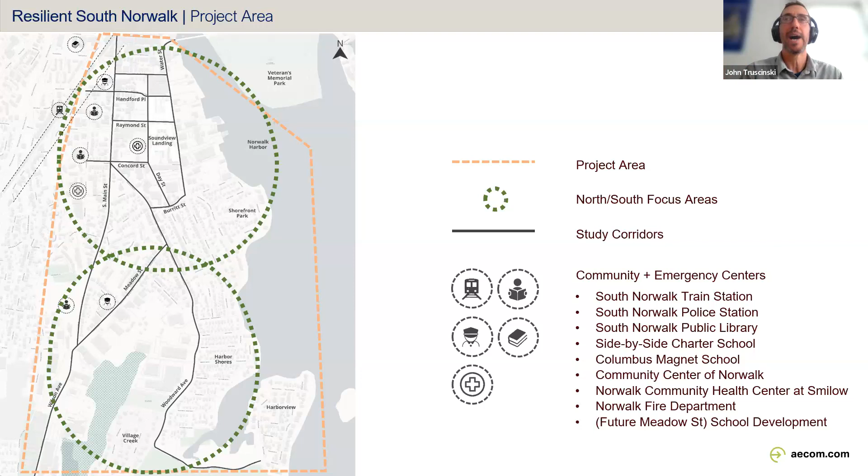As a reminder, the project has gotten through the first couple of milestones. The first part of the project was about mapping out the existing and the future conditions related to climate change.

This map here is one that the team put together, and it's showing the extent of the floodplain in the future under what we call a 1% annual chance storm, with the addition of 20 inches of sea level rise added to it.

And where does the 20 inches of sea level rise come from? That is the current guidance under Public Act 18-82, for municipalities to consider 20 inches of sea level rise by 2050. That is the upper bound of the likely range of what we expect in terms of sea level change out to mid-century.

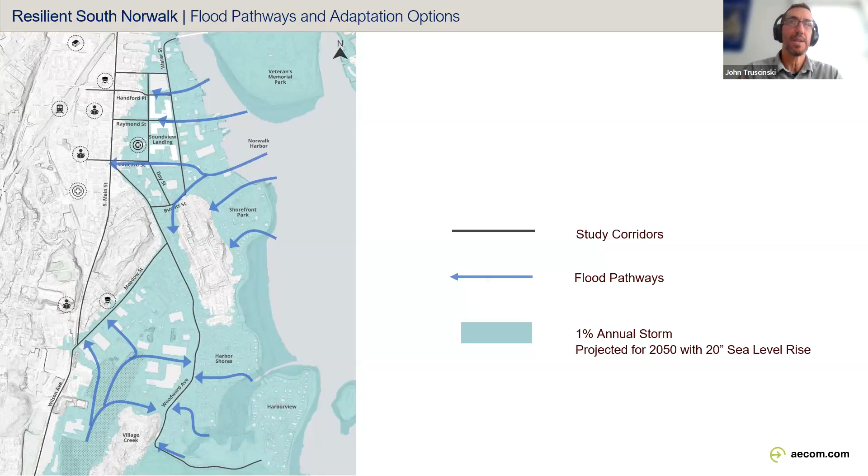Part of what's challenging is the team is sort of getting at all the different flood pathways, all of the different ways in which coastal storm surge enters into the area. So it's not just about blocking or cutting off the water in one location. There are multiple pathways in which a coastal storm surge will enter into both the northern and the southern part of the study area. So we're trying to get at that with the first part of this and looking at the future conditions for coastal flooding.

So this is the next step of the project, evaluating the set of what we call these adaptation options. What can we do, what solutions can we recommend and come up with to address both the flooding aspects of this and then also the increase in temperature?

Part of the reason why South Norwalk was an area that we felt we needed to prioritize was because you see this combination of vulnerability to heat and vulnerability to flooding.

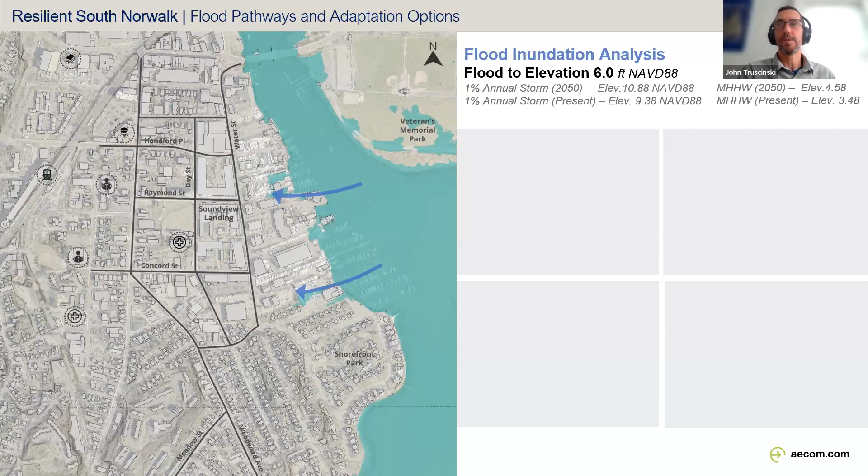This is the AECOM team starting to put together what they call the kit of parts, or the toolkit of potential adaptation options that the city can pursue, and starting to get those into a summary format for the public and for the city's staff and leadership.

So the first thing that we've looked at is the stormwater modeling. We have some schematics of the drainage structures and some of the pipe capacity and the network of stormwater pipes that we've gotten from the city.

So we have at least some understanding of where there are some pipes that just have limited capacity, where we have larger pipes feeding into smaller pipes, which could be causing some stormwater flooding as a result. And then we have some areas where we've identified outfalls that, during a higher than normal high tide or a storm surge, may be backflowing water in through the drainage structures into the street.

So that's kind of the low hanging fruit that the city can look at: adjusting the pipes with a backflow prevention, or looking at ways to just make sure that the storm surge is not backflowing water into the street.

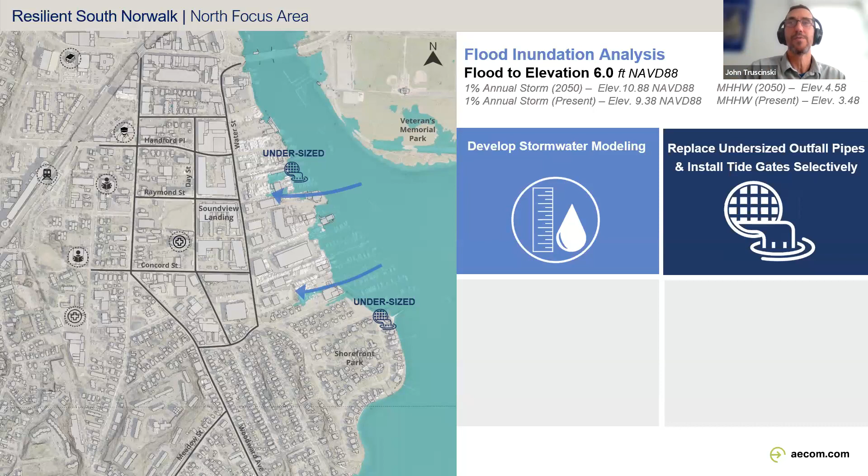The other aspect of doing a more in-depth stormwater model is that you really need to go out and do a survey, doing precise measurements of all the inverts and pipe sizes to get a more high resolution picture of where the capacity is insufficient for the amount of rain that we currently get and that we're going to get in the future. So the first couple of things are related to that stormwater.

The third thing is about green infrastructure. This is a way of trying to retain more of the stormwater. I'm sure most of you are familiar with the concept. The team is prioritizing this set of roads here for some sort of green infrastructure, retention and detention type strategies, and that can help to both improve some of the road flooding and also has a water quality benefit. So green infrastructure has got to be part of the toolkit in this area.

If you're looking for an example where a city is taking this approach, you can look at New Haven, where they've done a lot of distributed green infrastructure around downtown, and then they have projects to increase the capacity of the pipes that are conveying the stormwater.

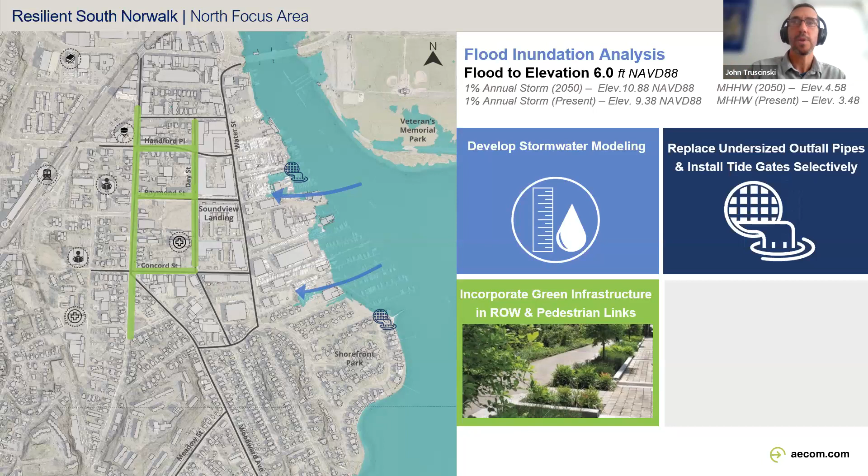This fourth aspect is about one of the key questions we wanted to answer with this project. To put it as simply as possible: under future conditions, which of the roads are going to flood under a range of different scenarios, and how high would the city need to elevate those roads in order to maintain dry access and egress across these roads. So basically we wanted to look at which roads are going to flood, and how high we'd need to elevate them to prevent flooding under these different scenarios.

So the next couple of slides are focused on that aspect of where we are in the study. Again, we are looking at this range of scenarios, and probably the simplest way to put this, it gets confusing with all the numbers, but all of these numbers are expressed in what's called NAVD 88.

So this is the vertical datum, basically the current expression of sea level, the 0.0 for sea level. So when we look at different storm surges and how high you would need to elevate the road over the expected storm surge, we look at these in NAVD 88 to understand it.

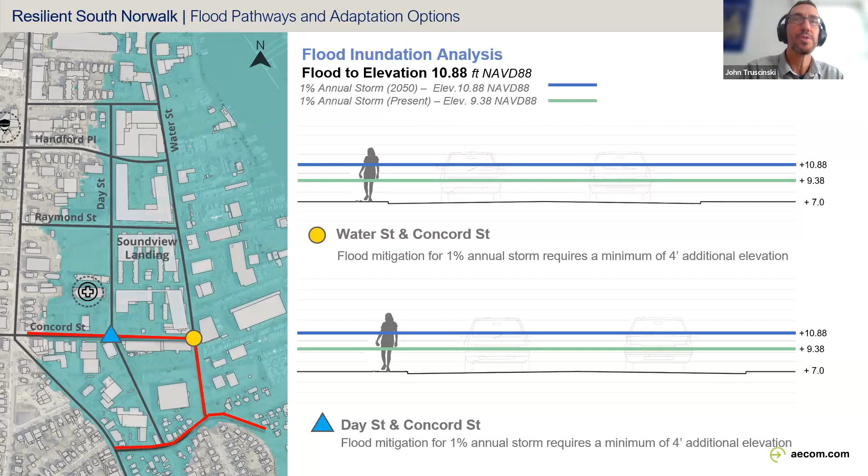So currently, the depth of flooding is about up to your waist. The future flood would be up to your chest, because the road is at elevation 7 now. That's the case for both the intersection of Concord and Water, as well as Concord and Day—both are at elevation 7 currently.

Now, what's interesting is that the redevelopment that happened—I think this was Soundview Landing, but also the redevelopment of the park at the corner of Raymond and Day, John Ryan Park—already elevated that intersection as part of the redevelopment. That intersection was brought up to 12.5 feet, so it's already above the future 1% annual chance storm with 20 inches of sea level rise.

Now compare that to the intersection of Raymond and Water, which is one of those spots where the road is actually at elevation 5. In order to bring that part of Water Street up above the 1% annual chance storm, you'd have to add a lot of elevation to it. So that's going to be tricky.

We can get into what makes that complicated as we go along here, but I just want to get through the rest of my slides.

This is comparing, so if you decided that Day Street is the corridor to prioritize for elevation, you've already got that intersection with Raymond and Day which is already high, and then it slopes down as you go south.

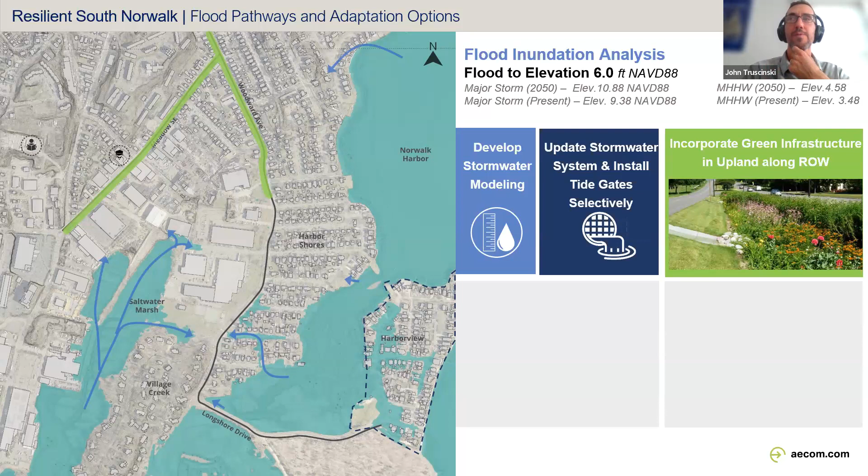The team also looked at the edges of Village Creek. They proposed this idea of flood berms or something like that. I'm personally a little skeptical about that because you're not going to be able to put flood berms directly up against the tidal wetlands there.

So the thing to think about there would be the commercial and industrial properties, those sites. How those evolve in the future is a key question. Any way in which you can improve the setbacks on those sites, improve some of the room to work with, would potentially allow you to take an approach where you put some kind of flood protection on the tidal wetlands side of those commercial properties.

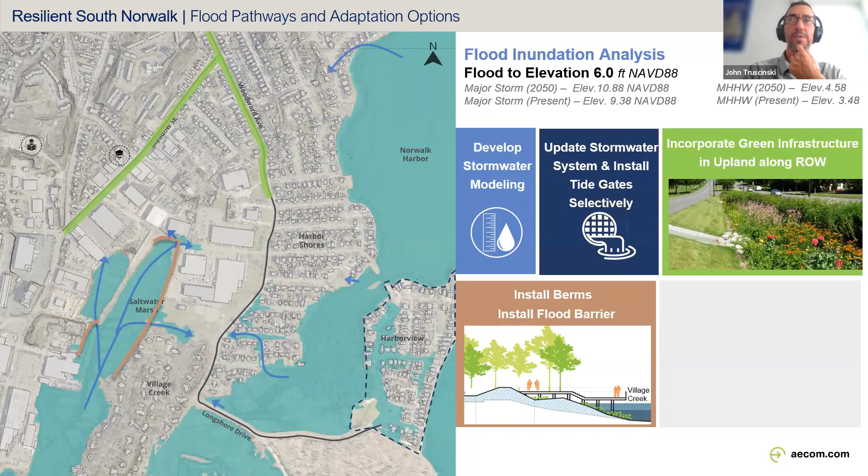On the properties themselves, you might have some room to work with in terms of flood protection. And then there's this particular stretch, I believe it's Woodward, where the road is actually pretty wide.

The team has started to look at this one particular stretch, the same set of scenarios, looking at how high you would need to elevate. It's a similar elevation. I think a lot of that stretch of Woodward is at elevation 7, so you need to bring it up 4 feet in order to keep it dry under a 1% annual chance storm in the future.

What I think the team is interested in is that this one stretch actually has a pretty wide road, and I believe there's a pretty large right of way on the side of the commercial industrial properties. So that might be a place where the city could think about realigning the road a little bit, and then elevating the road closer to those properties.

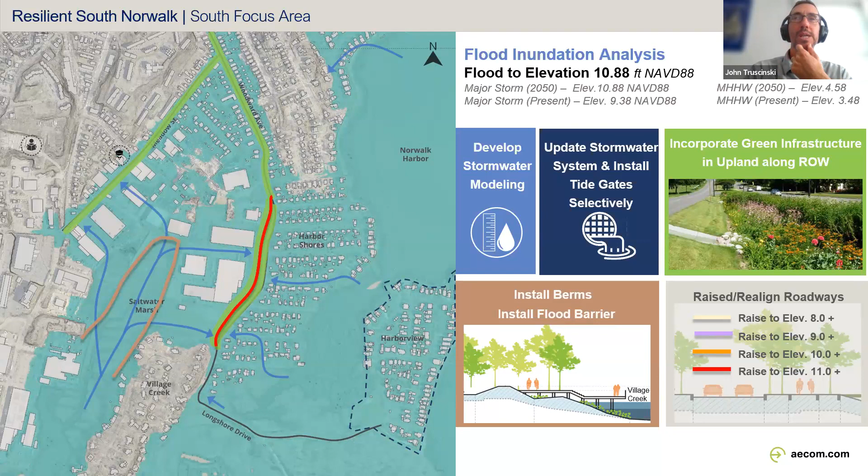Part of the challenge would be that all of the residential streets to the east of that would need to connect up to a new elevated road. That's what the team has started to think through, and what you could do. You can actually potentially keep the existing road and have it as a local road that connects up to the higher road.

There's a bunch of different things you could do in terms of green infrastructure, integrating it with some kind of stormwater detention or retention. You could also create a greenway with bike paths and think about trees and things like that. So it's an area where there might be room to work with in improving flood resiliency along this stretch.

Yeah, one thing we talked about, John, at the last meeting, I don't know if you were on it, was the problem with Woodward is that there's a lot of trees that have been taken down, so we have all these huge stumps. Tree addition is going to be hard.

Yes, right. It's more like if there was a realignment or reconstruction of the road, then it might give you the room to work with in dealing with that issue.

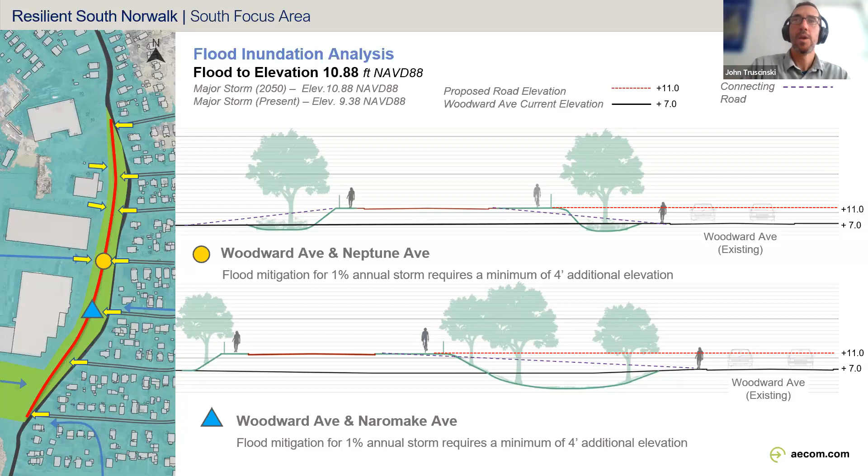So again, our project isn't just about flooding. The team is also looking at a lot of the heat aspects. So how can you maximize the heat mitigation? There's a whole bunch of different things that you can do.

Looking at pocket parks and things like that, street trees. You can look at the cooling centers and the community centers in different parts of the city. So there's a whole bunch of stuff related to heat that I think the team is still kind of fleshing that out a little bit, but it's also something that we're definitely looking at.

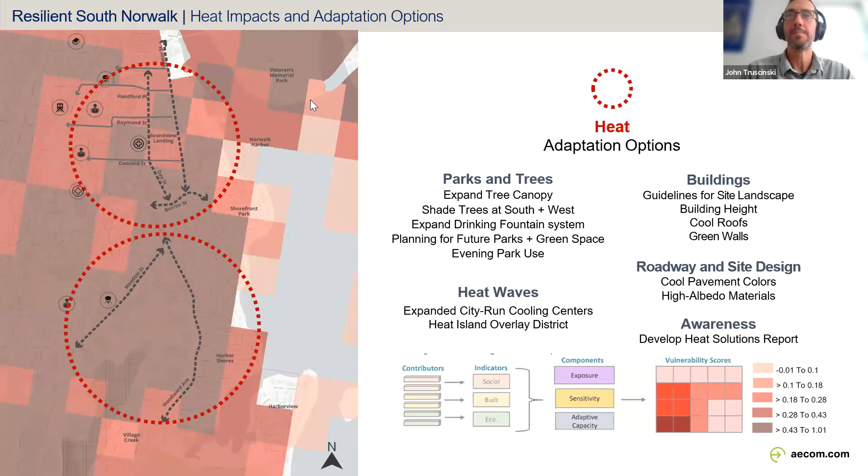The last thing that is interesting and has come up in discussions is this idea of potentially a resiliency overlay. I know the city's been going through the rezoning and thinking about rezoning, so you could create basically an overlay zone. And what are some of the types of things you could put into a resiliency overlay? There are some cities that are starting to do this, and we are looking around at other cities around the country for examples.

So there's one in Norfolk, Virginia, where they have a really bad flooding problem. So there's different examples out there that we're looking at. Essentially, as there is redevelopment or as properties are changing, you could try to think about how the properties would connect up to higher elevation roads. You could think about the stormwater specifications of the sites, and in certain parts of South Norwalk, you might want to make the stormwater regulations just a little more stringent because of the flood concerns.

You can think about the different aspects of maximizing the flood resiliency of the sites through an overlay. And that might not be as much of a big project, but it might have a longer term impact, especially if the city is doing a lot of redevelopment. And so that's something... go ahead.

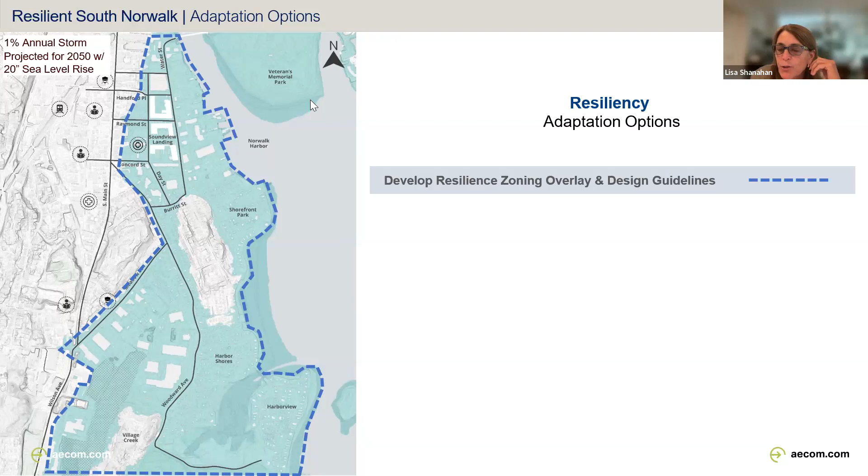Sure. I think the places where we're initially recommending green infrastructure is in the upland part of South Norwalk - so as you go up the hill from Water Street, on Day Street, on South Main Street. Those are places where when there's a lot of rain, the water travels down the hill into the stormwater system, and all the water is traveling down towards the sound.

As far as along the water side of Water Street - is that the area you're referring to? Marina side, yes. I think there are green infrastructure approaches that would be good there too, because all of the water is flowing down the hill and going onto the marina sites. Whatever is on those marina sites gets soaked up in that water and goes into Long Island Sound. So thinking about changes to property or redevelopment, it would be good to try to retain more of that water before it discharges into the Sound. You can do that through green infrastructure.

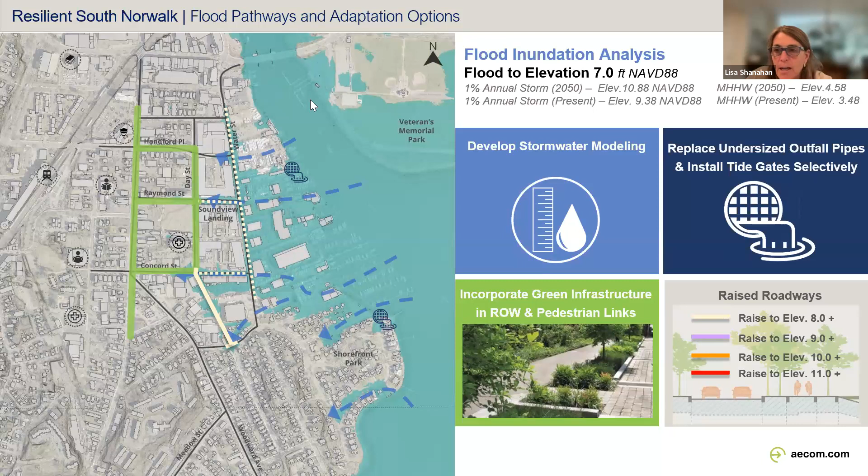Thank you, and thanks for coming and for revisiting other people's work. I know you're just one of the team, but you had to carry the whole bucket of water, so to speak, today.